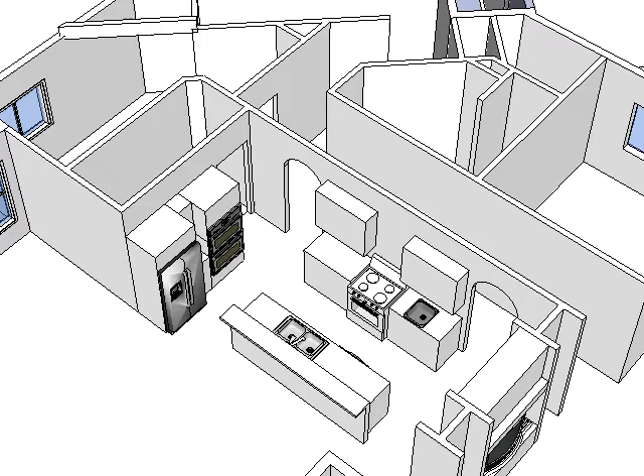Hi, you guys. I wanted to show you what I've been working on, your model of your home. I've gone back in and added more detail, and kept adding detail. But the first thing I wanted to start working on and show you is your kitchen.

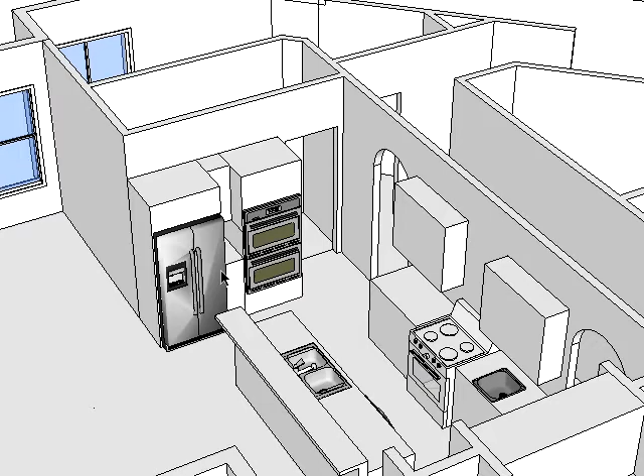With this change here, the one thing it does is cramp up this part. I mean, it's all doable. The most important thing is you have a nice big kitchen, and as long as we say okay, this is the size we want, exactly where everything goes, we don't have to determine until after it's framed.

What we normally do is frame the whole thing up, then get a cabinet guy out there to lay your kitchen out exactly, so that when the electricians and plumbers come in after the framing, they know where to put everything.

So I think even this Dutch oven might have to go over here, or the refrigerator go back over here, or move this door perhaps over to here, so that this eliminates that. I don't know, you probably don't want to do that. Or maybe move the door around here. I don't know, we can think of that, but there isn't much room.

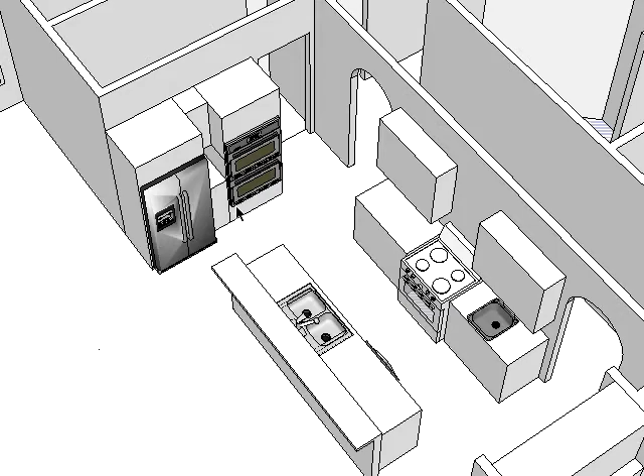I just want to show you when you put in the kitchen, the reefer, you have to allow 36 inches minimum for it, and then a minimum that I can see, 30 inches for a Dutch oven, and that leaves you about 12 inches at the very most. But that's fine, that all works.

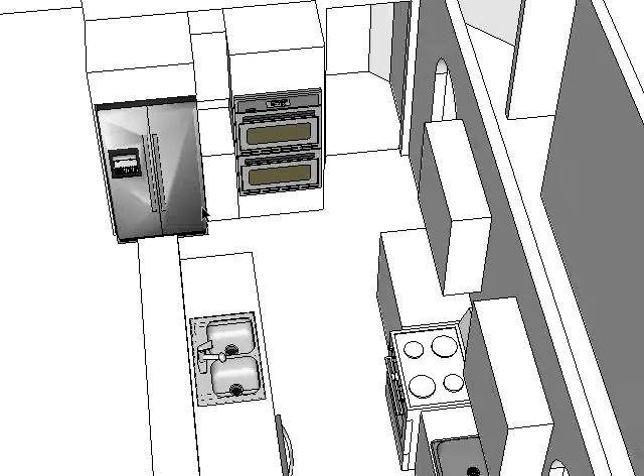And then other than that, I drew in a fireplace here that I found online, just to give you kind of an idea. Just something I found online.

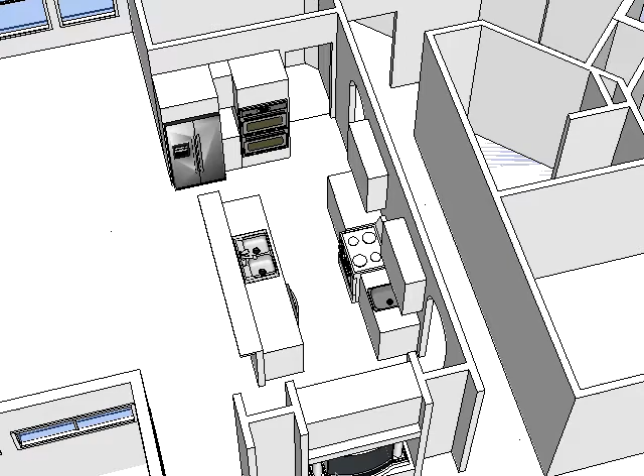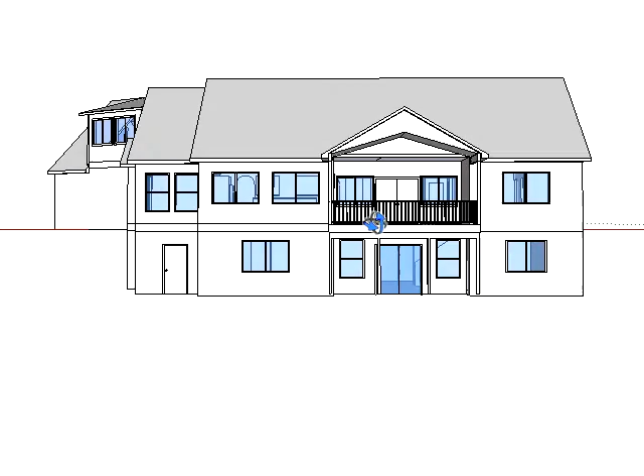Other than that, Elaine had said something about you guys wanting to put in a cathedral, or that you were talking vaulted ceilings. At one point in our discussions, let me change this. At one time we had talked about running a cathedral or vaulted ceiling through here, and it was going to change the roof all around. It was doable, it's all doable, but it was kind of a major change, and I remembered we'd left that out.

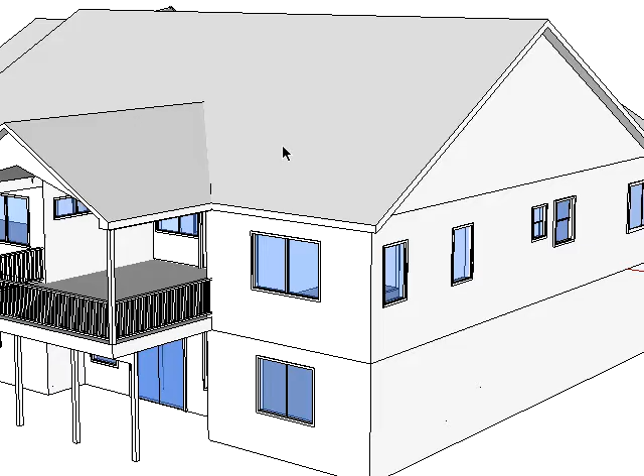This being cathedral through here, though, if that's not the case, it's not that big a deal. Framing-wise, it's the same. They're going to have to do something different with your trusses, is all. But I do need to know if you're thinking cathedral.

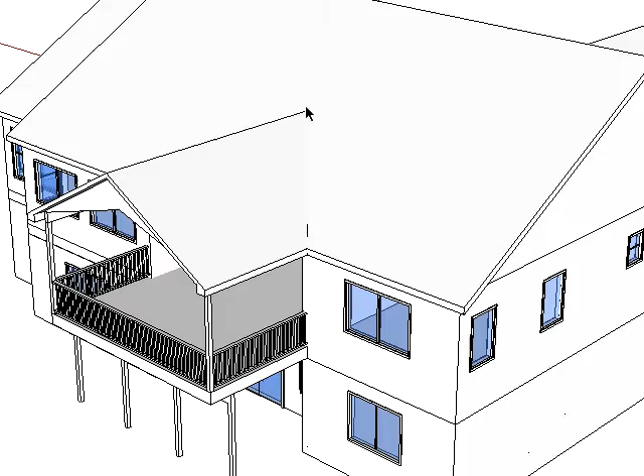This way is pretty. It's not impossible, but it's going to be a lot more expensive with what they've got to do with the trusses and the way the roof's got to be built. If the cathedral ran basically along that ridge line through the living room, though a cathedral running this way along this ridge, that's way simpler as far as trusses and framing goes.

But they're both doable. We just need to know when we get the truss bid, the framing bid, and the drywall bid. But I had remembered that we cut it out.

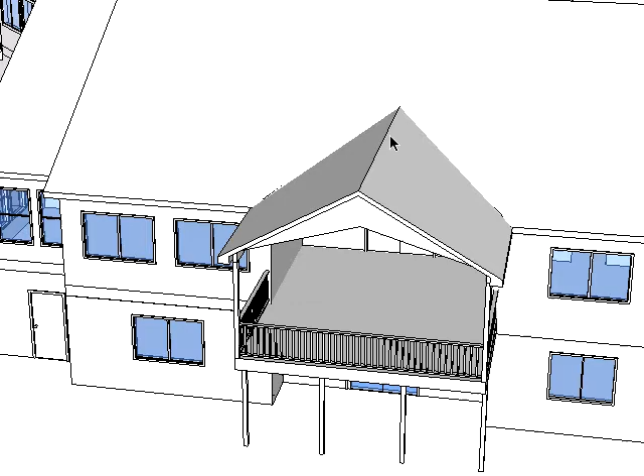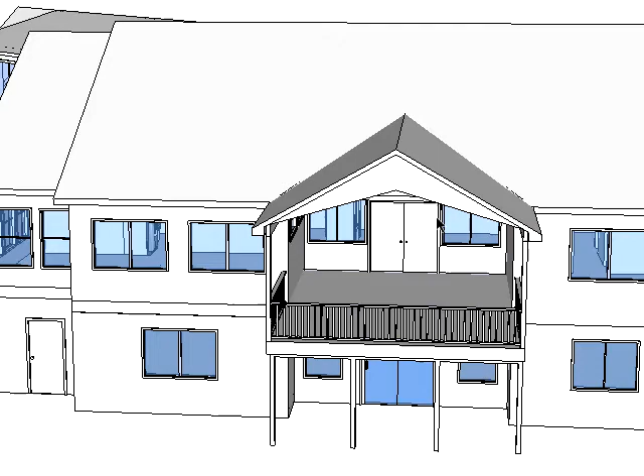Now maybe we didn't. Going back and looking at the plans and everything, normally I would have written it in, and I thought we discussed it and went all the way through it, and I thought you guys had said you decided not to do it, but I don't remember. A lot of this stuff, I wasn't thinking about me building it, and I didn't remember all the details, so I go back with what I wrote down.

The other big thing we got to think about, Tim, is remember that this comes out about 8'6" further than this up there, meaning this section from, I think it's 8'6" across here. Even though it's got a roof up there, this is still cold here and this is heated down here.

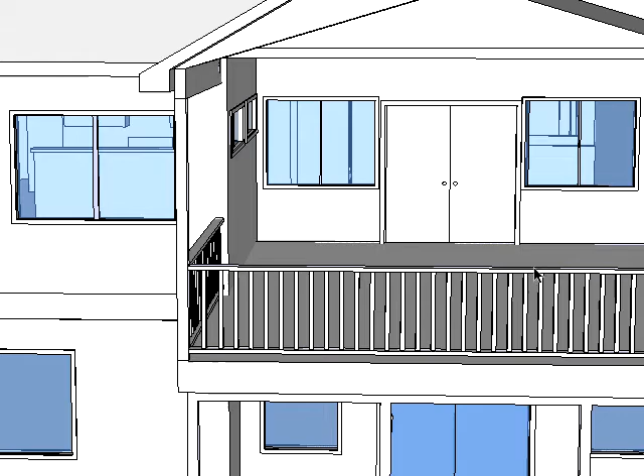Again, when I drew this, I wasn't planning on building it, and I just figured you'd have to decide with your builder what you wanted, what kind of method you wanted to use across here, because it is going to take some special work and thought and research, and this is not the simplest thing to do, though like everything else, it's doable.

So anyway, I wanted to get this off to you and get your thoughts, and I guess we probably should meet. I'm going to have all my stuff done for you guys over the weekend, or before the 1st, and it'd be kind of nice to, I don't know, Elaine and I even drove out to your place New Year's Eve, or somewhere right in there. I'm going to get real busy that week, and I'd like to do it maybe Wednesday or something. I know we can talk about it.